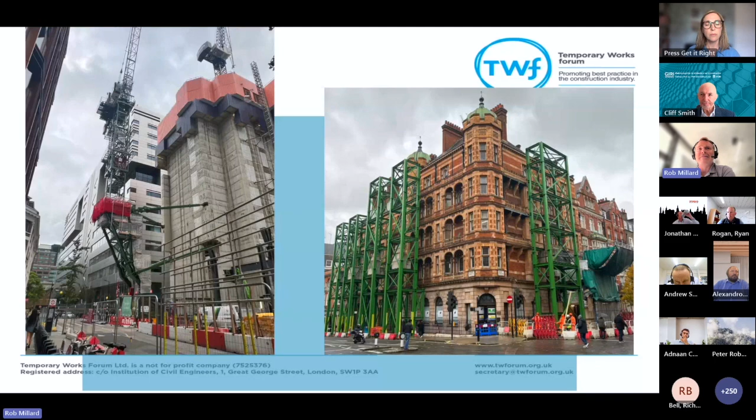Let's be honest, I'm going to link the Temporary Works process, BS 5975, in what I feel actually adds value and looks at de-risking. Likewise, with the one on the right, you've got the public, you've got interface and approvals by a lot of councils, AIPs. So there's a lot of areas that error can occur. So who has responsibility?

So if we think about what GIRI says, working to eliminate error in construction, Cliff's already gone through the thing. So the definition of error: any action or inaction that results in requirement rework, a requirement for extra work, or produces a defect. Defect is any failure to meet the project requirements at handover.

A lot of people with Temporary Works think that's always to do with safety, but let's think about it. Isn't it actually the same principle? We're avoiding rework, we're avoiding errors, we're avoiding lost time and things like that.

So let me go into the research report. They identified 17 root causes, the top 3 of which were inadequate planning, late design changes, poorly communicated design information. For those of you familiar with Temporary Works, does that sound familiar? A lot of the reasons we have questions and concerns that people have raised.

So GIRI are very clear: any change to be successful must rely on a variety of human, cultural and behavioural factors. Now that's, I think, really important, because let's be honest, we really have to address those human, cultural, behavioural factors. A lot of things are linked that way.

You only have to look at behavioural safety. Why do we have to go to those levels of behaviour when actually most of us just think, well, that's just what we should be doing? So isn't quality, isn't checking, the same kind of process, the same kind of thoughts?

So BS 5975 - who'd have thought - one of the main aims of the procedure and the method of work adopted should be to minimise the chance of errors being made, and to maximise the chance of errors being discovered if they are made. Now, which one do you think came first?

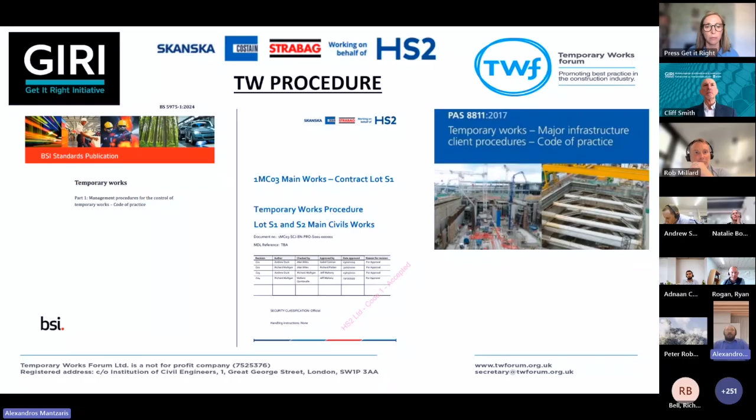Now, moving on, we talked a lot about competency and appointments. So we have a system and Power Apps that allow us to appoint, as per BS 5975 requirement, the people that need to be appointed, i.e. mainly the temporary works supervisor and coordinator. So the designated individual and their delegates can jump in, record all the training that person has, record their experience, and then log it on a live system accessible by the right people to make sure everything is up to looking, they have the competency to do it. We do the same with the temporary works designers using a competency assessment system, meaning any design team doing work on the project needs to have the right competency. So we score them against types of temporary works to make sure everyone does the same thing.

Of course, it's not just temporary works professionals that deal with temporary works on a big project. So we always need to be conscious that there are commercial people, safety people, people on site, a lot of other disciplines that need to be involved with temporary works to get it right. So what we need to do is come up with temporary works awareness courses, which we have on the project. This can be on design awareness, this can be on how to write a temporary works design brief. This is very important because this is where the input information, as mentioned before, is coming from, and this will control the quality of the outputs a lot of the time. So we do hold dashboards on the project. We record everything electronically to make sure it's up to date and everyone has the training they should have.

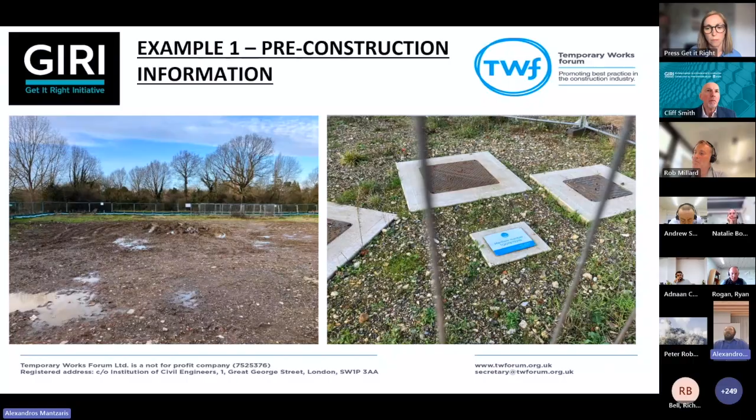So we said, okay, we just got this site - what is the information we have on them? Is there a health and safety file? Let's look at the handover information. That was requested, and we realized that there is actually a shaft on location in combination with the manholes, and then some sensitive assets from a third-party owner. So obviously this reduced the capacity to use this as a storage area, or for a crane to operate, and the logistical routes.

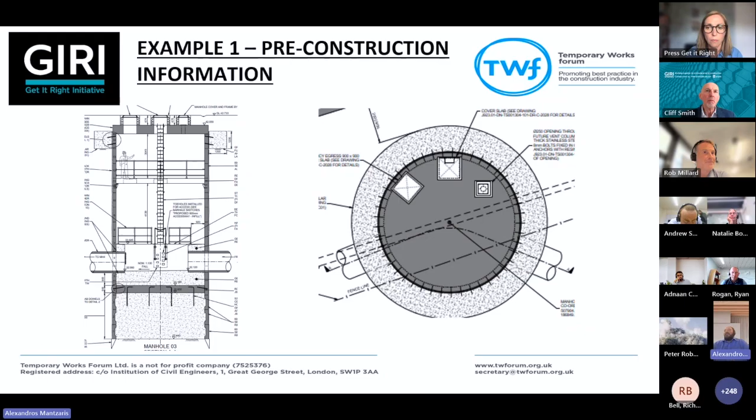After that, we had a discussion and had to choose another location. This was an error realized at the temporary works design brief stage. The temporary works designer and coordinator were reviewing the information and picked up that there might have been a gap there, a lack of handover information at the right time.

The resolution was to not pursue this plan further and get a final, alternative location. As Rob mentioned before, this was value added because cutting it then avoided third-party impact. It also avoided delay of works when it was realized the plan wouldn't have worked, since any separate route would have meant going another way.

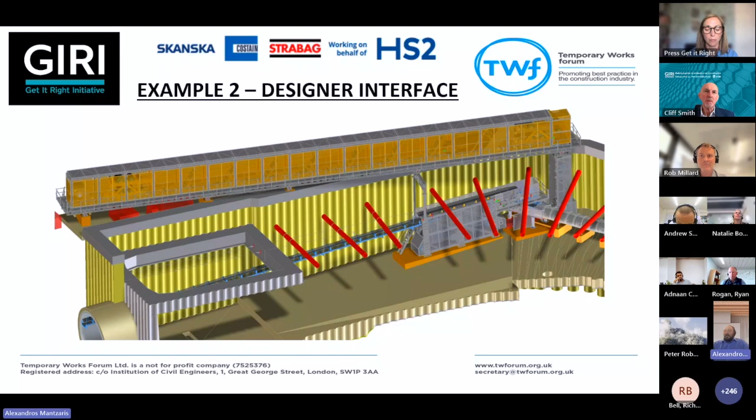As a result, a design was developed by the conveyor steelwork designer, and when the first preliminary drawing came in and was reviewed by the delivery team and coordinator, it was realized there was actually a clash between the temporary works whaler propping scheme and the conveyor steelwork. Once this was realized, we got the two designers in a room and tried to figure out how to best proceed from this point.

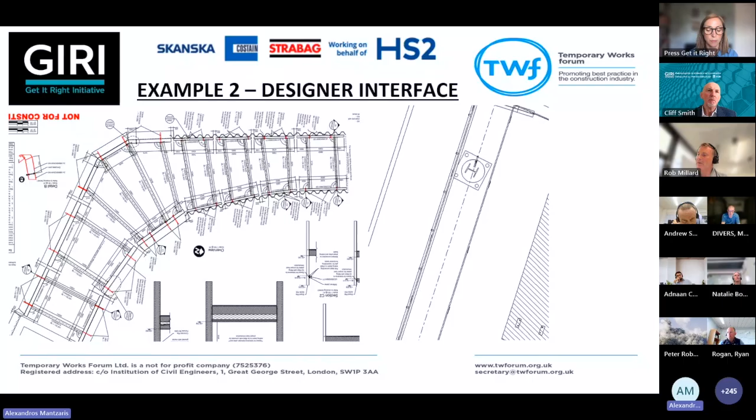Due to space constraints and the fact we had to keep an open haul road for tunnel and utility vehicles, there wasn't much we could do to move the material around. So we decided to redesign the whaler to achieve an opening where the clash location was, and also add additional bracing on the conveyor steelwork to make sure no additional loads were imposed.

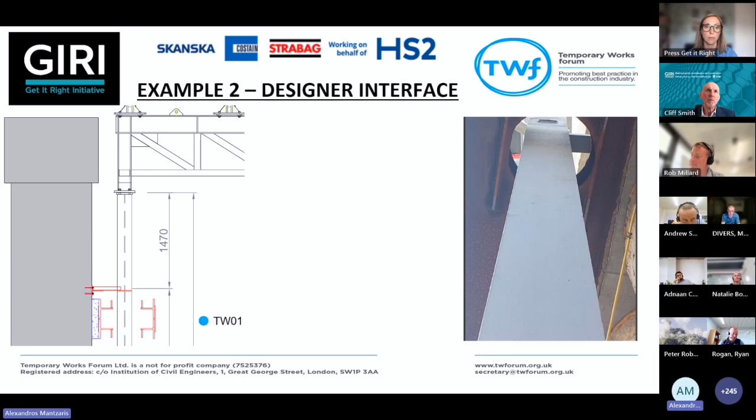The error was caught at a relatively early stage, even though the plan didn't change significantly. Had we not realized this before getting to site, it could have led to a lot of delay and rework, with people under pressure trying to find a solution. This was caught at the preliminary submission stage.

It was delivery and the TWC reviewing the P01 drawings. The root cause was design interface. We resolved it through technical queries to the two designers and performing the additional strengthening and modifications required. The value added: avoiding a clash on site, avoiding delay, avoiding additional design, and more than anything, avoiding errors that would have come from doing this at the last minute.

The third example I'd like to go through is a crane platform that was supposed to perform a lift under possession. The design consisted of granular material being laid, overlain by crane mats, and then the crane performing the lift.

During the hold point inspection at an early stage, the TWC went out to see how the compaction and installation of material was being carried out, and it was realized that the material used was not exactly what was specified by the designer. Instead, it was crushed material utilized from another site, seen as a faster solution. Now, be that as it may that the material could have been stronger, it obviously wasn't what was specified in the design.

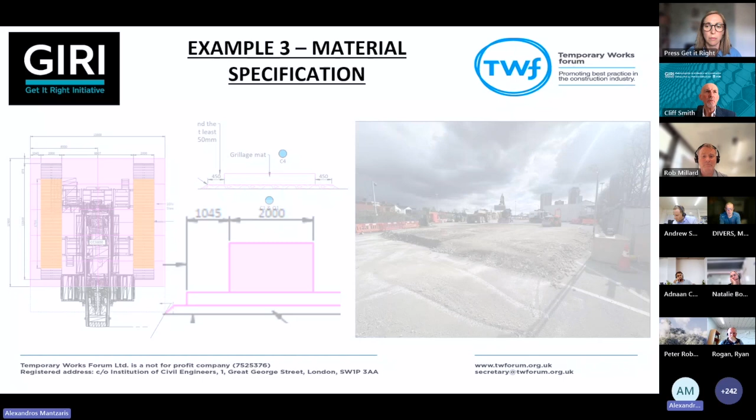To avoid the error, we had to go back to the designer, provide all the available information, additional information on the grading of the material, the type, where it came from, and specify additional testing to make sure it's the same or stronger than the original design material. That was at the permit to load stage.

During the hold point inspection and sign-off, there was this material specification and procurement of it, and maybe planning of the procurement. The resolution was a technical query raised to check the new material, which came back fine. The value added: safeguarding possession, avoiding delay, and avoiding any crane delay costs.

This is a recurring thing sometimes, and something that GIRI has highlighted in a good way, is that sometimes specifying material may be seen as something that is in the final stage. If something takes too long to be procured, maybe I can just use what I already have, or maybe I can use an alternative product. However, it's important to understand that changing that product could result in design changes. So it's just people being aware that they may be doing that when they are doing this.

The final example I have, before wrapping up, is another about material specification. This is a false work design from one of our sites, where a false work will be stood up in order to support steel fixing, access, and eventually a concrete slab pour. So that was successfully done.

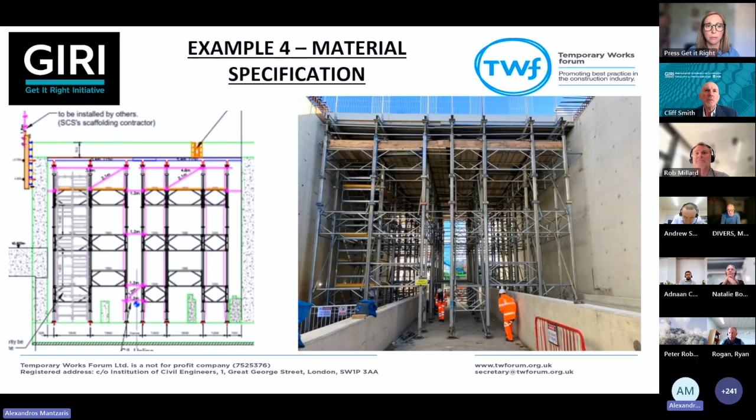As you can see, in the stage where we're doing the inspection and signing off the hold points, it was observed that a few of the ledgers actually looked slightly different than the rest, and also slightly different than what the supplier data sheet was showing them to be. In some cases, maybe with some additional members or just with different members.

So the TWC raised this up with a subcontractor, and it was realized that some of this stock was actually historical, coming from the 70s, if I'm not wrong, which was used successfully back then, but it could mean that it's actually not in compliance with the current material data sheets, and it was something that would be difficult to justify. Also, some of them had undertaken modifications, again potentially making them stronger, but we didn't have a clear track record of when this happened, how this happened, and how this is impacting the stock material.

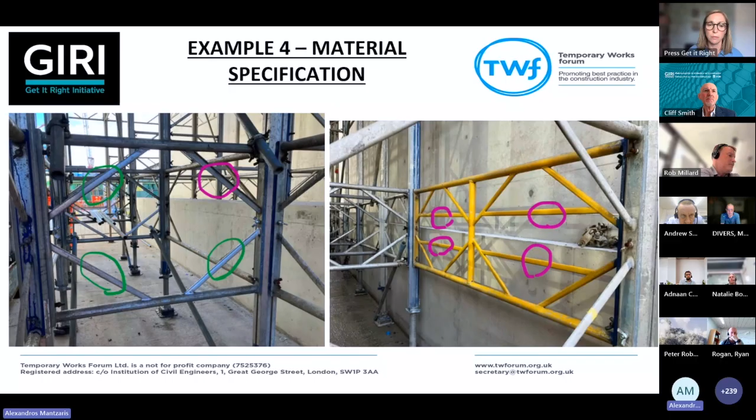So again, this was done at the permit to load sign-off stage, from a hold point, from a temporary works coordinator inspection. Material specification, stock material could be a reuse because of that. So we removed the material that had these issues.

There were some cases where this material was creating a lot of risks for being removed, and a lot of safety risks. So in these cases, we came up with a plan to strengthen them, put additional bracing in, so that we could make sure they were performing as intended. This went back to the designer, it went back to a checker, it was signed off, seen as safe, and the value was added, potential weak points eliminated, any delay avoided, and also the stock in question was quarantined, not to be reused in our project.

This is the last slide I have. I would just like some closing thoughts to wrap this up. We have a system in place. We don't want to be complacent, so we have a lot of checks and measures to make sure. At all stages, the most important thing for us, and as you see in these examples I presented, is always a person that is competent, being there at the right time, reviewing what we are doing, and making sure of catching any errors, eliminating them, and making sure they are resolved.

Thank you very much. That's all from me.

Great, thank you very much, Alexandros. That's really, really useful. Cliff, we've only got a couple of minutes for questions, so if you're able to just pick a couple of questions that you think would be most pertinent, and any other questions we don't get to, we can respond to by email. Yep, okay, well...